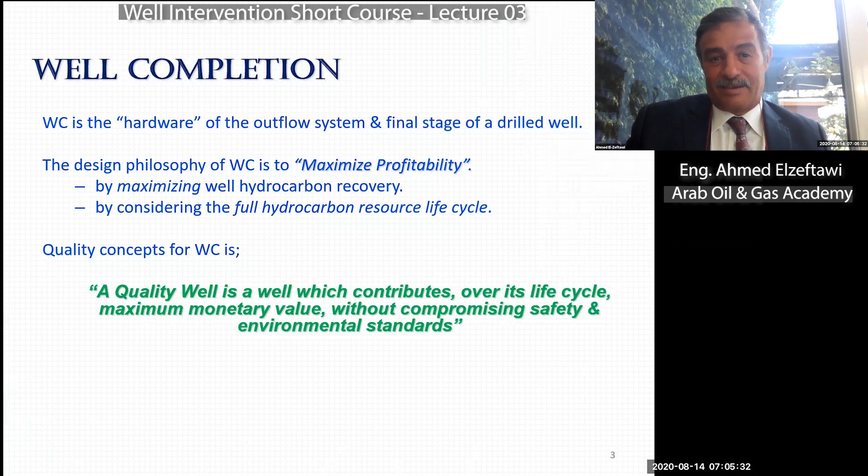Gas is the drive media. Without the gas, which is pressurized, no one can allow this oil to go out by itself. The oil needs a drive mechanism, which is the gas.

That's why, while designing the completion, you have to be sure that when you drill this hole and perforate, what comes out from the reservoir into your production tubing is a mixture of gas, oil, and water. And you have to be smart enough in your design to not let the gas escape out of the reservoir, going through the production tubing all the way to the surface without having anything in his hand.

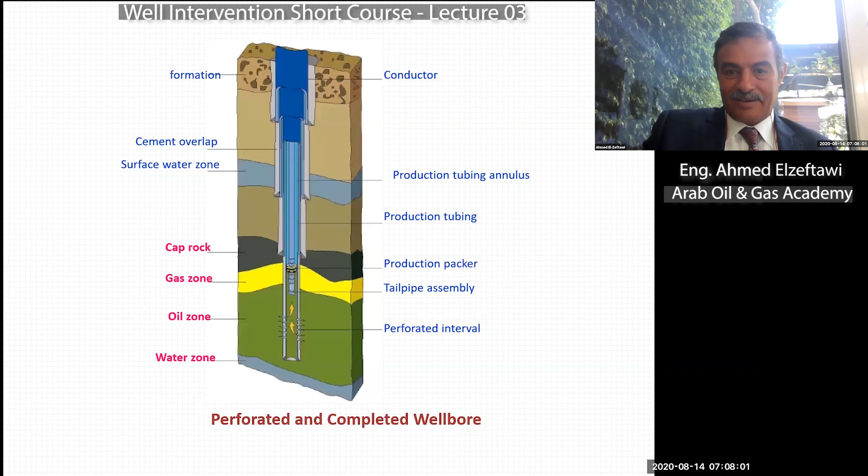We have what we call conventional completion, which is the normal completion we are using. It's a standard completion having a lot of accessories, which we are going to talk about. Each accessory is to do a certain function. And you have what we call monobore completion. The monobore completion is a production tube we run in the hole, but without accessories. Why, Ahmed? And if we can run completion without accessories, why do we run completion with accessories?

This is a big question, but normally we use a monobore completion in wells where the reservoir pressure is very low. So when we perforate, and then we have this mixture of gas, oil, and water start coming out from the reservoir, going up to the well, what lifts these liquids, which is the oil and the water, to the surface? It is the gas. If the pressure is low, that means the velocity is low.

And when we have accessories, like the ones that we will talk about, each accessory restricts the flow, because actually it's a smaller ID than the completion tubing itself. So this is a smaller ID. When we have the flow going up, this smaller ID restriction you make creates back pressure to the reservoir. So if the reservoir pressure is not strong enough, not high enough, the well will die. It will be a dead well.

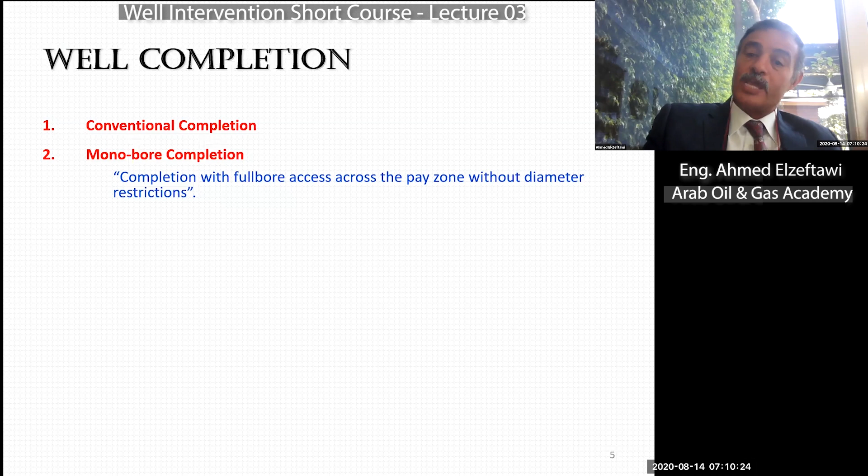That's why in some applications, we need to tell the pressure downhole, don't worry, you can go all the way to the surface, there is no restriction in your way. How we do it, this is not the course to talk about it. But I need you to know that we have what we call monobore completion, where it does not have accessories. And actually, if we need an accessory, we can run it temporarily in the monobore completion for a certain purpose and then remove it again. You don't have to know why or how in this kind of course, well intervention course.

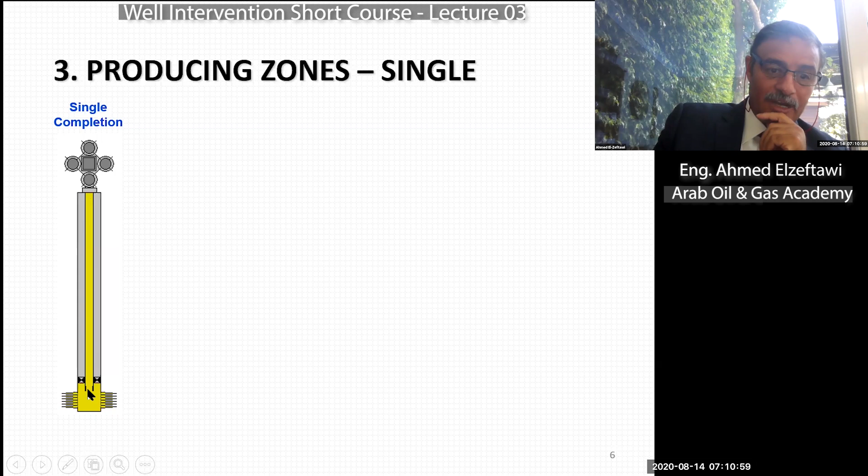What you see here is a single completion where we have a Christmas tree on top, and this is the casing, and we have the production tube all the way down, and this is our pay zone. This is where we produce from.

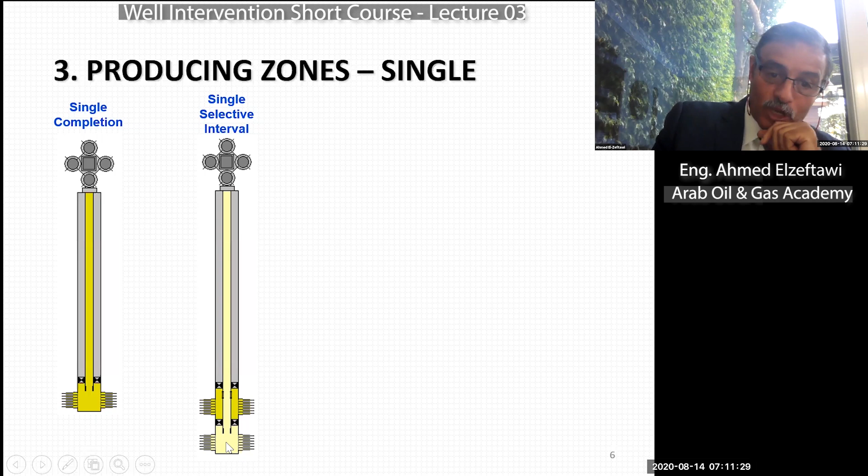This is typical. Sometimes, if you have two zones, upper zone and lower zone, what you see here, we still have one single completion, one production tubing going all the way down. And here we can produce from the lower zone. Why can we not produce from the upper zone? Because here we have what we call SSD, sliding side door. This is sliding side door, it is a closed door. So you cannot access the production tubing.

But here, we are producing from one single completion, one single production tubing, and we are producing from the upper zone only. We prevent the flow from the lower zone by having a plug at the end of the production tubing. You see it here, this is a plug. And we open the SSD, the sliding side door. So we are producing now from the upper zone only.

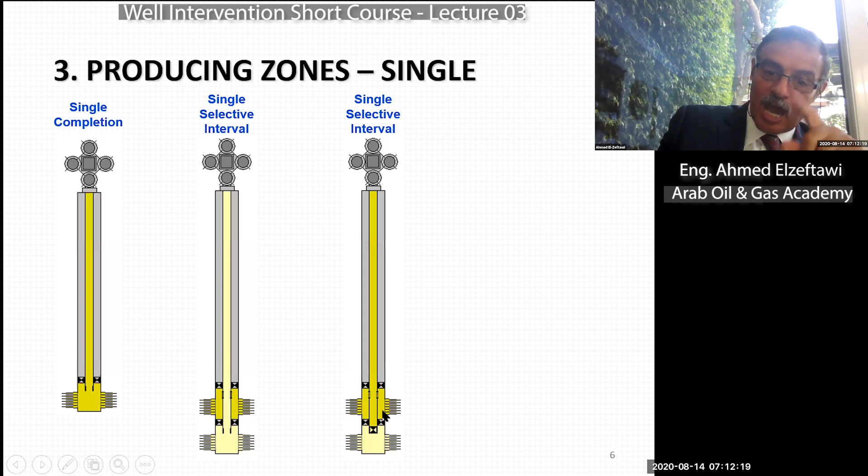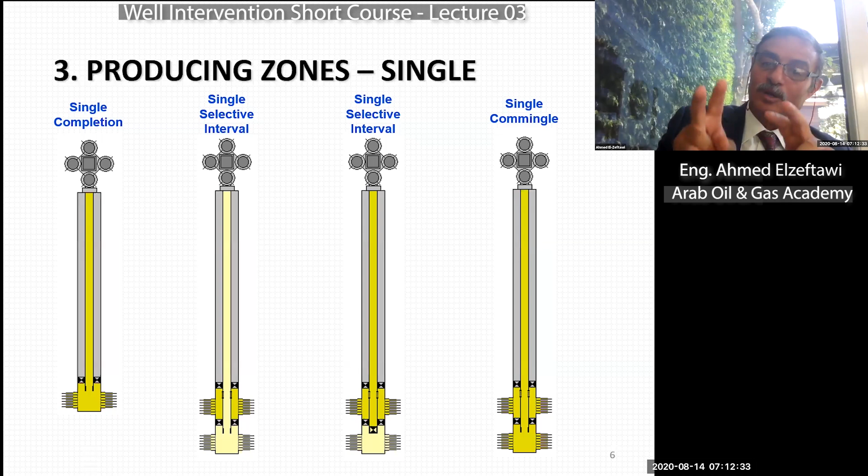In this example, the SSD is open. So now we are producing from both zones at the same time. We do this in case you don't need to study the characteristic of a particular zone. So you don't care, you just need flow out.

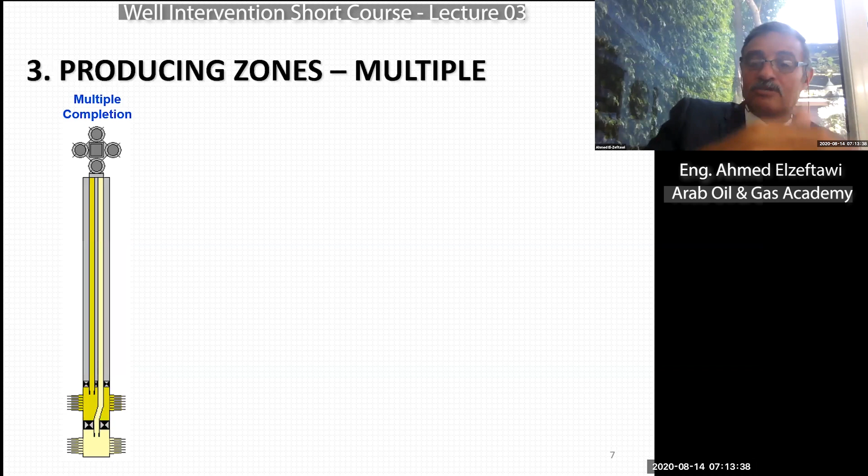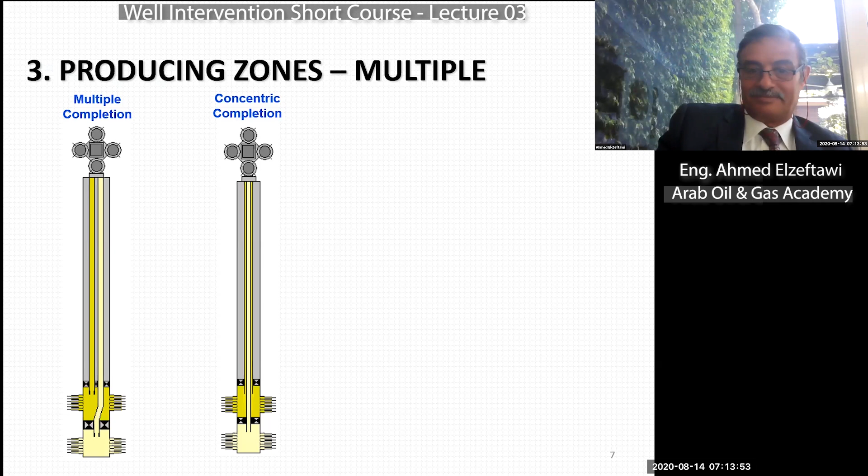So the packer mainly is to isolate these flows. In this example you see here, we have two production tubing, but one is inside the other one. What we have here is three zones, but we use only two pipes.

In this example, what you see is the short string. We are producing from the upper zone, the lower zone, and the middle zone, sorry. Why? The long string is to produce from the lower zone only. While here, what we have is a short string producing from the upper zone only, and a long string producing from the lower zone. The middle zone is not produced, because what we have here is an SSD, sliding side door, which is closed, so you cannot produce from the middle zone now. Ahmed, which one do we use?

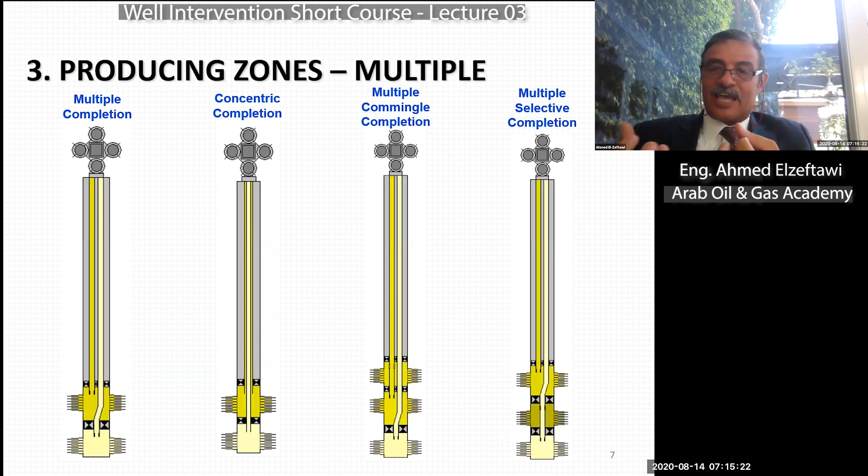Which is the best scenario, either single or dual? If I answer you this question, I'm dummy, because to answer this question you have to give me so much data, and based on that I can tell you the best scenario for this particular well.

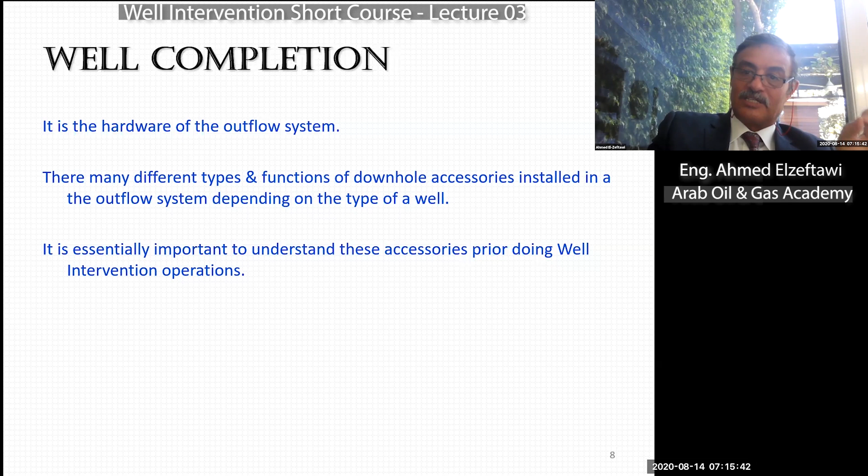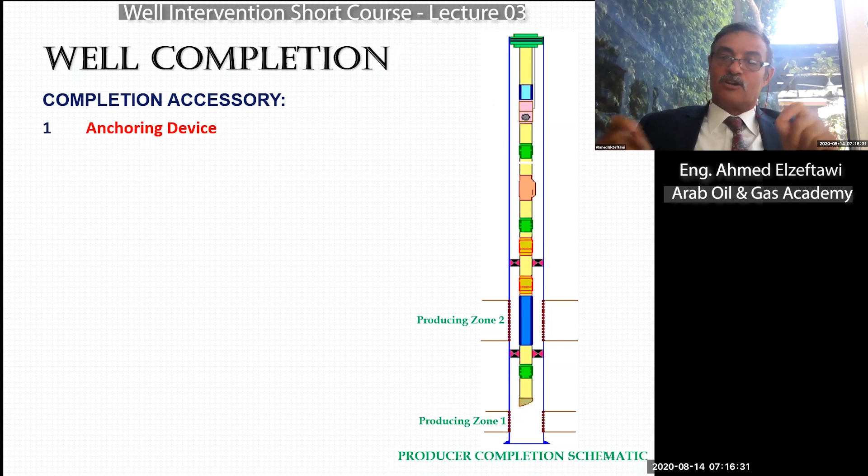So the first group we call anchoring device, where we can put under this name any device we use in the completion for anchoring. And we have the circulating device group, where we put all the devices we run in the completion that we use for circulation. The third group we call the isolation device group, where we put all the accessories we use to isolate.

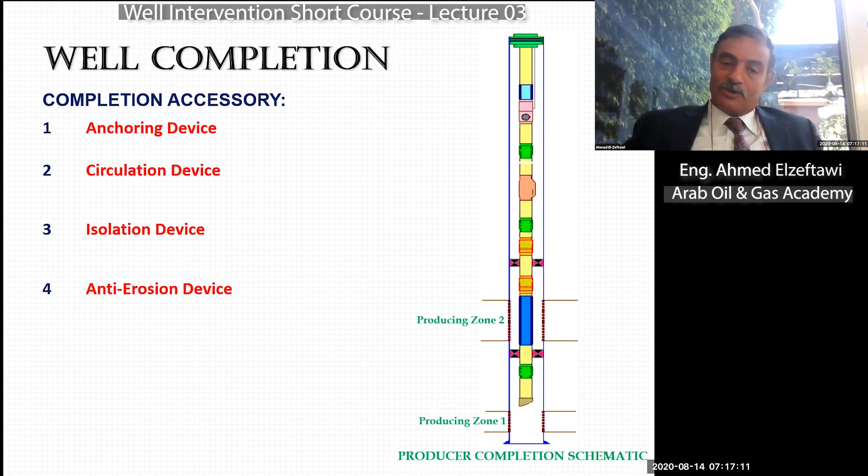The fourth group we call anti-erosion device, where we put the accessories we use to prevent erosion or minimize erosion. And then we have a group called other, where we put all other accessories we use which we cannot classify into one of these 4 groups.

So when we talk about an anchoring device, mainly you have what we call landing nipples. And if you look at the drawing here, you will find a lot of landing nipples. Is it 3, 10, 5, 4, 1? I cannot answer you this question. It depends on the design. The design depends on the data you are providing this software.

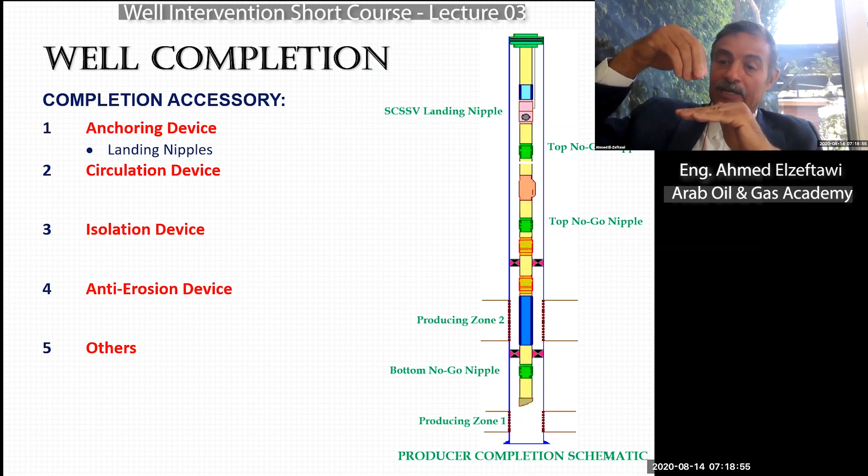But anyhow, these landing nipples—and please, you will see here what we call top no-go, bottom no-go. Don't be confused with the word no-go, because some people believe that no-go means nothing will pass through. But no, we mean by no-go, it's a shoulder inside this landing nipple. This shoulder will allow everything to pass through, except the one flow control device, whatever valve or plug you are running.

You need to set it in this particular landing nipple. It depends on size at the end. So it will allow everything to pass, but it will no-go—it will prevent its particular plug or valve from passing through, because it has to be set on that particular landing nipple.

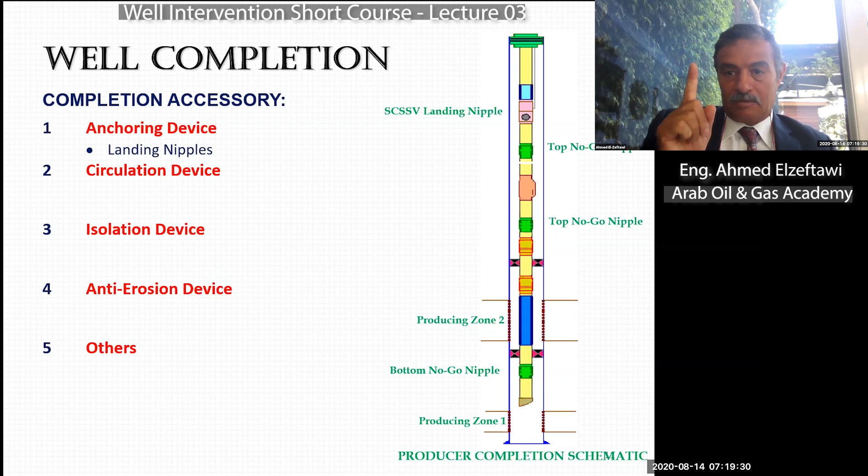Every landing nipple we use in the completion, it is for one purpose, which is to receive what we call FCD. FCD stands for Flow Control Device. What is the flow control device? It is any device to control flow, which mainly means plugs and valves. Plugs and valves—this is what we call flow control device.

I repeat, all landing nipples we run with the completion have the main function of receiving a flow control device. What I said is applicable to all landing nipples we run, except one, which is the last landing nipple in the completion. In our particular example here, you will see it here. This is the one.

This one has another main reason. This particular one is mainly to allow you to isolate the reservoir from the lowest possible point, to protect your reservoir from the lowest possible point, allowing you to make any operation above without affecting your reservoir. It is true that we use it for some other purpose, but this is the main one. But all other landing nipples—the main reason to have it, please—is to receive flow control devices.

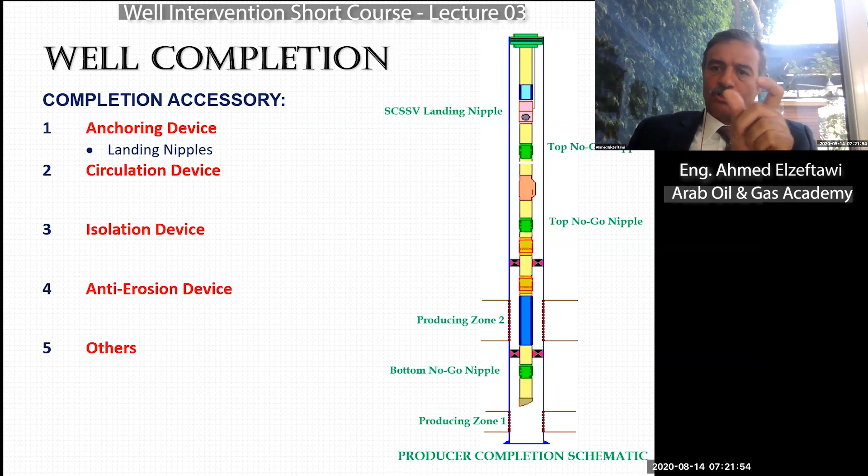One day in my lectures, I gave this question to the guys as homework. The question says: what is the purpose of a landing nipple? So I gave him choices. One of these choices is to receive a flow control device. Another choice is that we use it for depth control.

So one of the wireline supervisors, while answering this question, selected depth control for correlation to depth. I said, thank you, but your answer is wrong. He said, come on, Ahmed, I'm a wireline supervisor for the past 15 years, and I'm professional in my work, and I am using the landing nipple to correlate my depth.

I said, yes, I believe you, and I know that you are doing that. But this is not the main reason we have it for. It is exactly...

...when I go to the supermarket to buy milk for me. And then Dr. Ahmed Al-Garhi says, on the way back, would you please buy me a packet of cigarettes? I said, fine, no problem.

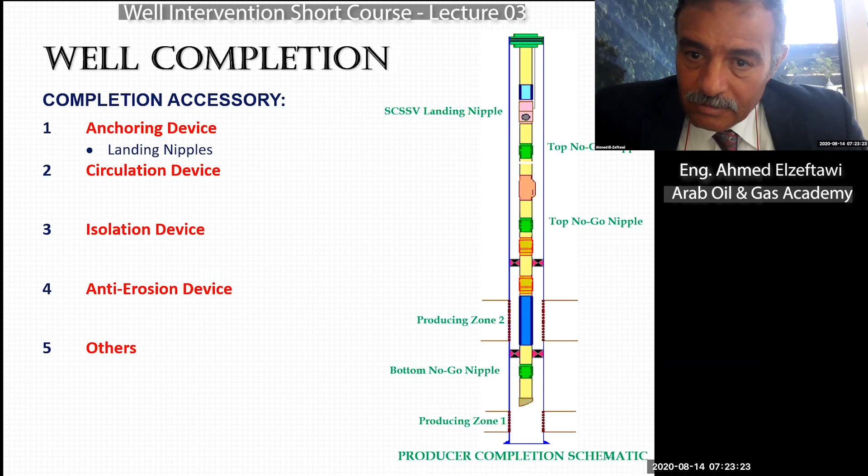If any of you guys ask me, Ahmed, where are you going? Should my reply be, I'm going to buy the packet of cigarettes for Dr. Ahmed Al-Garhi? Of course not. I'm going to buy milk for myself. These cigarettes I am buying for Dr. Ahmed, I am doing as a favor, but it is not in my job description. So remember that.

A flow control device, we run it to sit in the landing nipple. A landing nipple's main purpose is to receive it. If this landing nipple is doing 10 other things, yes, she's doing it as a favor. So a landing nipple is to receive flow control devices.

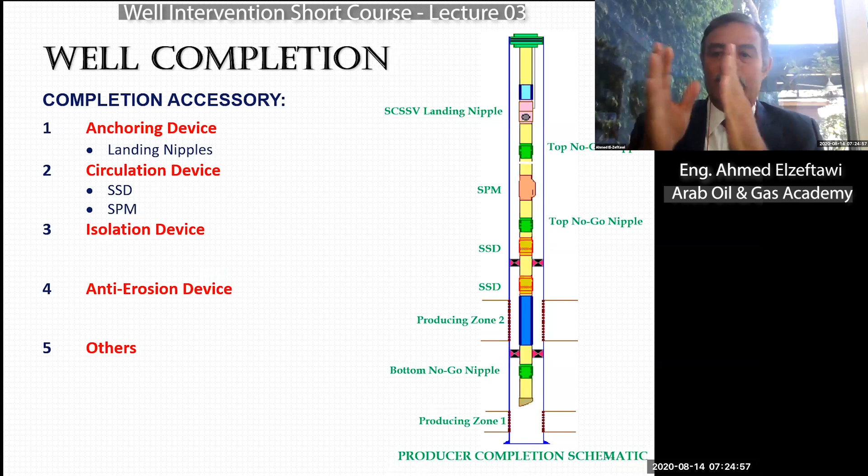When we talk about the second type, which is the circulating device, then automatically you should write SSD and SPM. SSD stands for sliding side door, and SPM stands for side pocket mandrel. These two devices are mainly to allow us to make circulation between tubing and annulus, or annulus to tubing. Annulus is the volume or area between the tubing and the casing.

We will talk about each one. Isolation device - the word isolation is welded to a word or device called Packer. And Packer is to isolate. The main reason for the Packer is to isolate. What you see here in this example, we have two Packers - a top Packer here, and a bottom Packer here.

This string of pipes and accessories, which its length might be 10,000 feet, 15,000 feet, 20,000 feet - which device here holds the weight of this whole string? It is a device on top here. We call it tubing hanger.

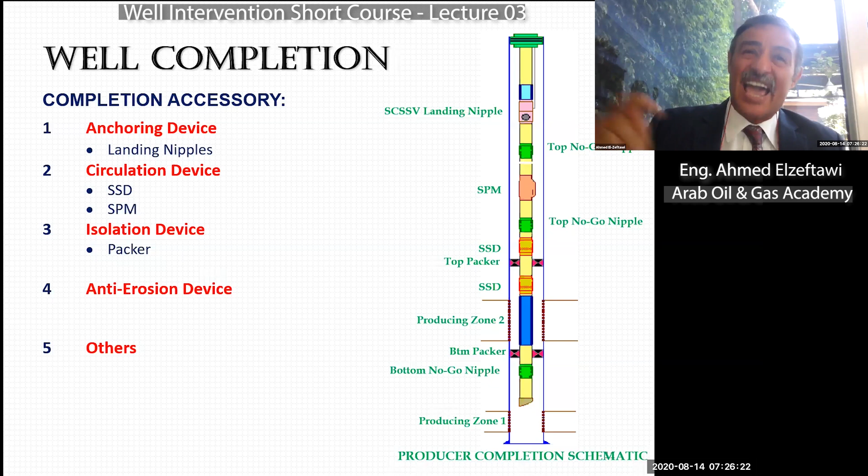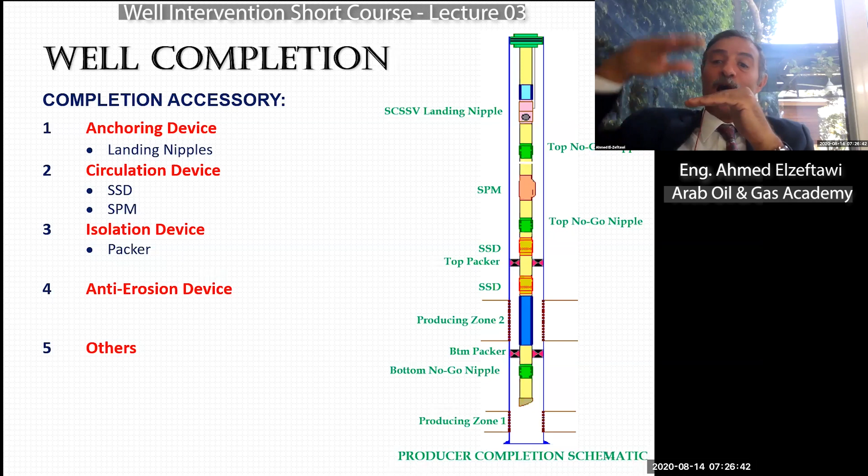But actually, the tubing hanger holds the weight of the top completion only, while the bottom completion is hanging by another device. I mentioned top completion and bottom completion - what is that, Ahmed? I tell you that. Anything above the Packer, we call it top completion. Anything below the Packer, we call it bottom completion. The majority, of course, of pipes and accessories are on top.

The bottom completion, actually, is a couple of joints - couple of pipes, joints, each joint is 33 feet. And it has some accessories like a perforated joint, wireline entry guide, a couple of landing nipples, and maybe permanent memory gauges. But this bottom completion is short compared to the total length of the well.

Here, what you see is the lower Packer. This lower Packer, and what's below it, is the tailpipe, we call it. The tailpipe is the bottom completion. You see these short pipes - this is hanging by the Packer.

But if I ask you, what is the main purpose of the Packer, and I give you choices, and one of these choices is to hang the bottom completion - if this is your answer, I will dig a hole and bury you in this hole, because your answer is 100% wrong. Why wrong? Ahmed, you just said a while ago that it hangs. Yes, I said it does, but it does this as a favor.

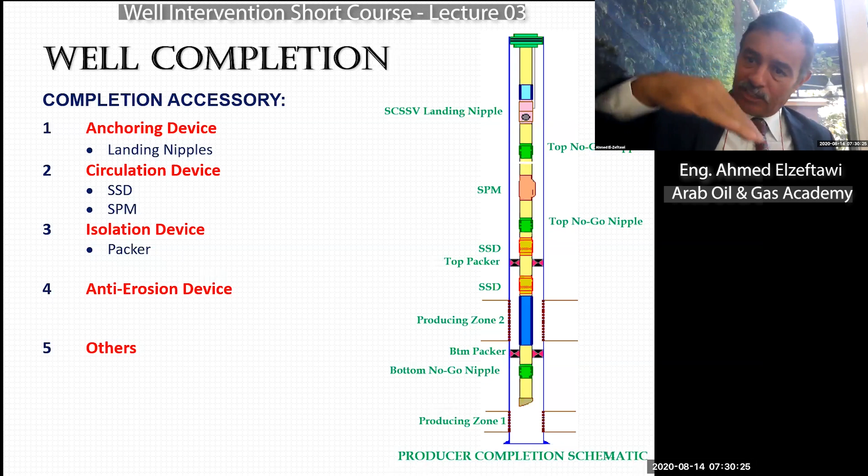This decline in production is a big story, and there are so many factors affecting it. But one of them is that when you produce from a well, the reservoir downhole is made of grains, particles of sand, as we discussed in one of our lectures. There's a minor distance between each particle of sand and the other, which you cannot see with your naked eye, only through a microscope.

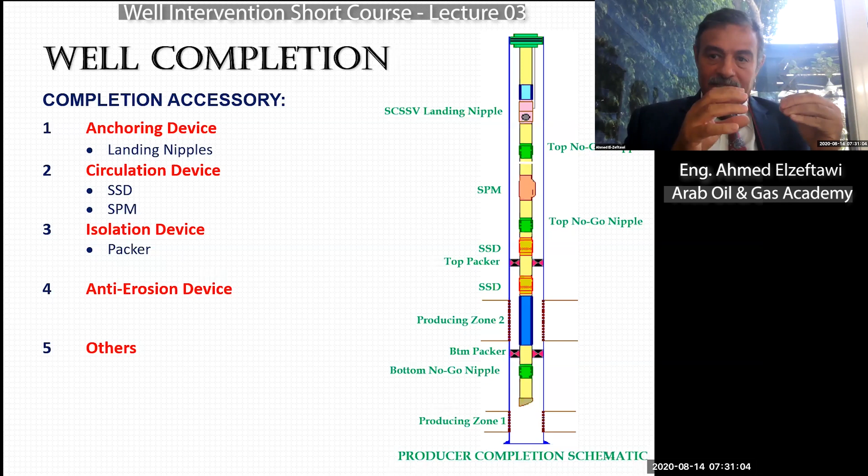Oil and gas go through these channels you cannot see with your naked eye, until it goes inside your well and up all the way to the surface. Over time, friction between the oil and these sand particles will reduce its velocity. Accordingly, some of the scales, wax, and paraffins will sit on the outer surface of these grains, making these streets more narrow, and eventually blocking them so oil cannot go through.

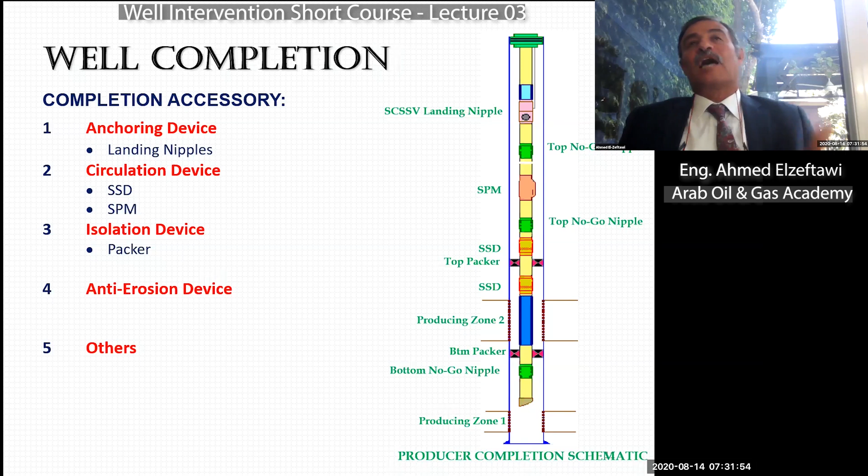If this happens, you have to do some of the solutions here, like deciding to do a stimulation job where we run coiled tubing and start pumping acid. This acid will penetrate these narrow roads or streets, eating away the paraffins, debris, and waxes, allowing the street to return to its original state.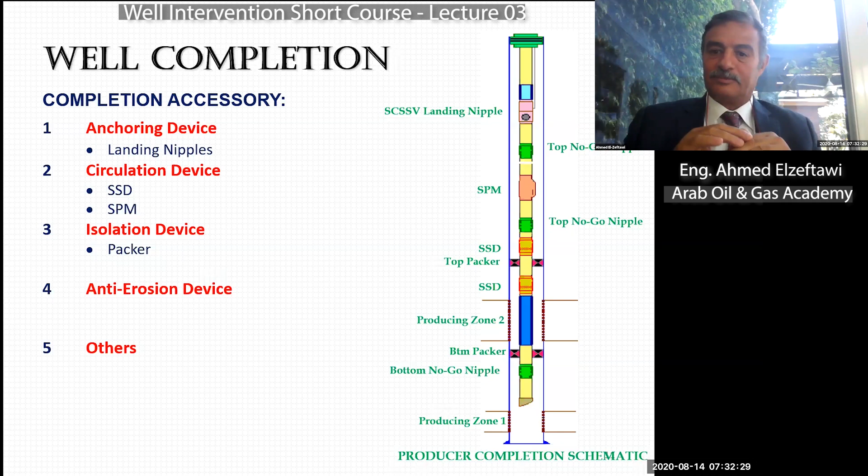If you don't have a packer here, the acid you are pumping through the tubing - part of it will not go into the formation but will escape out, filling your annulus, affecting your casing, eating your casing. So the packer is also there to isolate the annulus from the treating fluid we are pumping. So the packer is there to isolate. Keep that in mind.

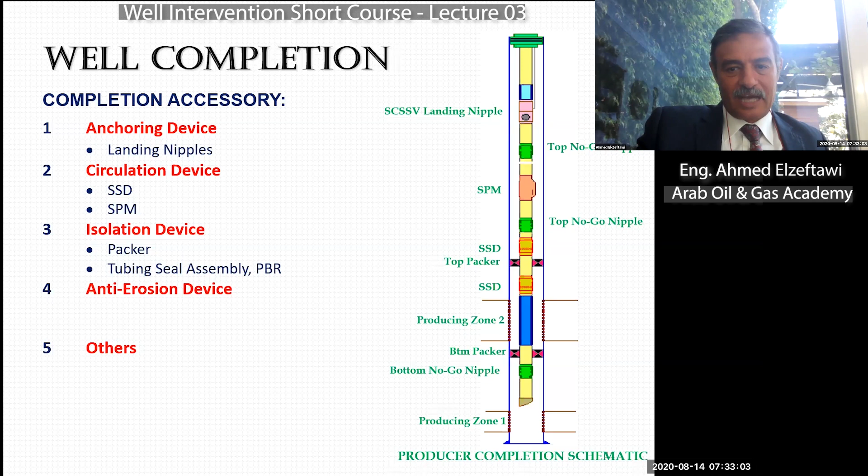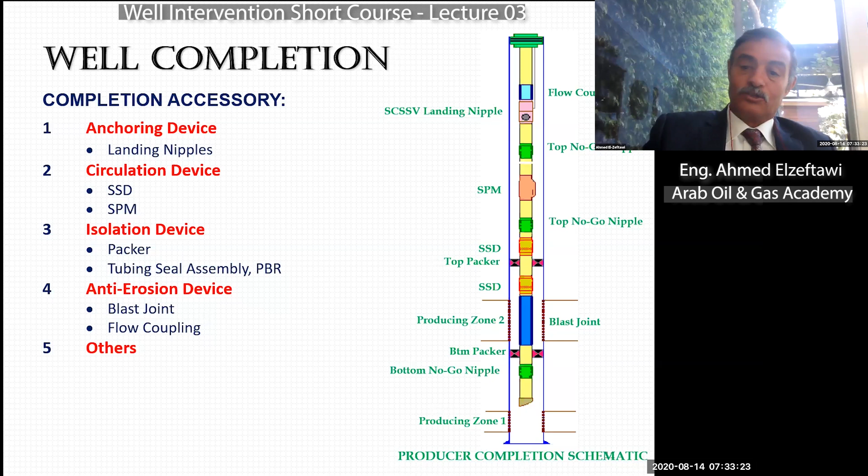The anti-erosion device has two types: blast joints and flow coupling. The blast joint is what you see here in this drawing with blue color. Since we have one single completion in this example with two zones, when we perforate the upper zone, in front of this blue device, oil will come out from the reservoir with velocity.

It hits the outside, the OD, the outer diameter of your production tubing. This erodes the OD of the pipe because it contains sands, which start doing like sand blasting, a hammering effect on the outer side of the pipe. After some time, you will have holes here. If this happens, you have to stop production, kill your well, bring a workover rig, and pull this completion all the way out to the surface to replace the damaged part of your production tubing.

Then run it again, which will cost you a lot of money. So instead, to prevent this from happening, in front of the perforation we put a pipe - but a heavy wall pipe. It has the same idea as the regular pipe, but the wall thickness is higher, so the OD is bigger. This allows it to resist the hammering effect, and instead of lasting 1 year, it will last 3, 5, or 6 years, depending on the material and thickness used. This is the main reason for having this anti-erosion device.

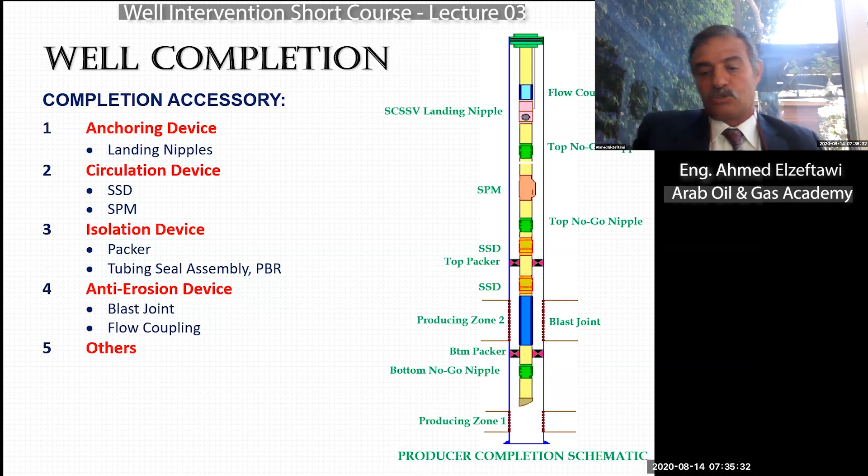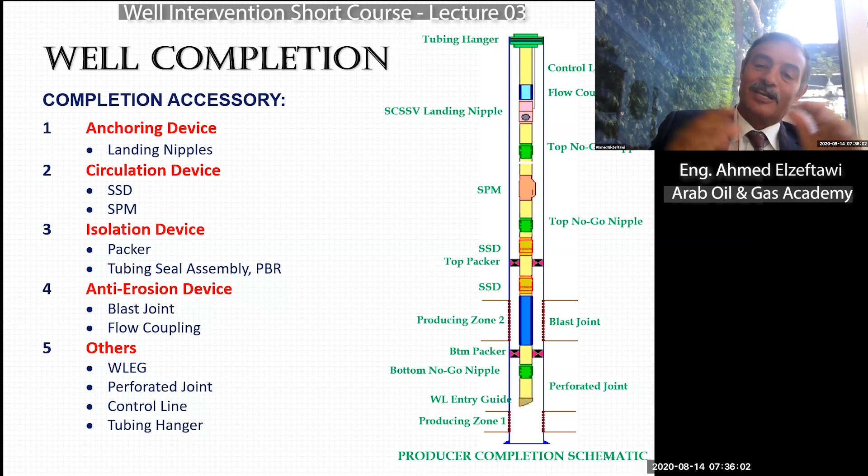Others, which contain all the accessories we cannot classify into these four groups, like the wireline entry guide, which is the last piece we put in the tailpipe. We also have perforated joints, control line, and tubing hanger. These are mainly the accessories we use in completion. Completion has two parts: one part is mainly below ground, which is all these devices we've talked about, and the other part, above ground, is the wellhead and the Christmas tree.

Although I am a mechanical engineer, and although I work all my life with international organizations, believe me, for years I didn't have the knowledge that makes me professional in my work. For example, for years I was under the impression that wellhead and Christmas tree are the same thing. What is this? This is Christmas tree. What is this? It is wellhead. The same. Till I got the knowledge that there is a big difference between the wellhead and the Christmas tree, which we will talk about in the coming session.

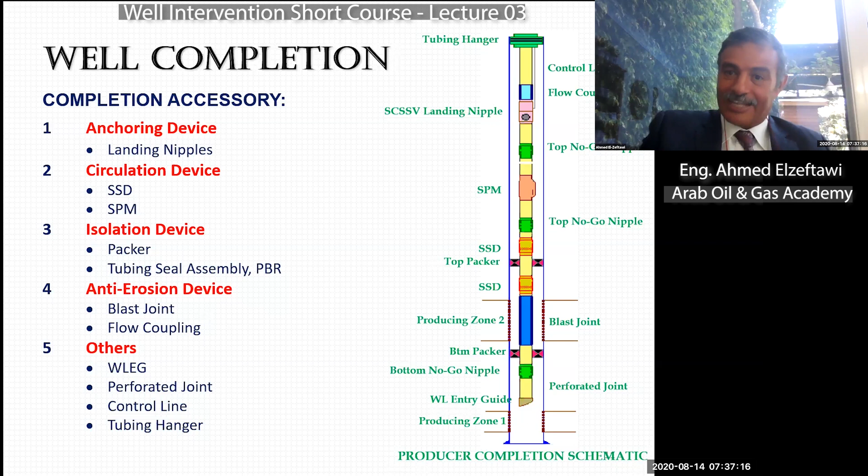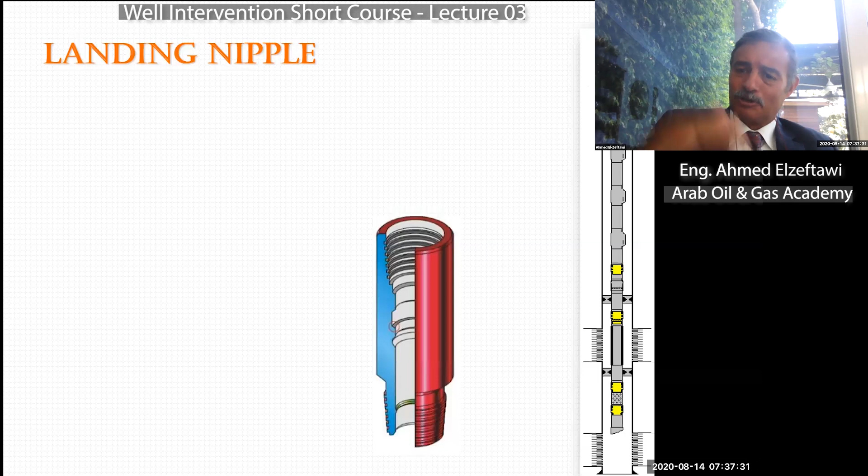So now let us start actually with our accessories. We start with landing nipple. What's a landing nipple? It's an anchoring device, a tubular short pipe, and it has 3 features: shoulder, seal bore, and profile. What you see here in this drawing, this is a landing nipple.

All landing nipples are to receive a flow control device, as we agreed, except the last one, which is to isolate the reservoir from the lowest possible point, although it does the same also. It allows us to receive a flow control device, but this is not the main reason like the others.

Any landing nipple has 3 features: shoulder, seal bore, and profile. Please remember, this is not a completion course, because if it were, what I'm saying would be wrong, since we have landing nipples without shoulders. Then I would have to go into what we call selective landing nipple and non-selective landing nipple, but this is not the course about that. Generally, any landing nipple has 3 features: shoulder, seal bore, and profile.

The aim of this course, what I need you to know about the landing nipple, is 2 things: why we use it to receive a flow control device, and how we use it. How we use it is by utilizing these features.

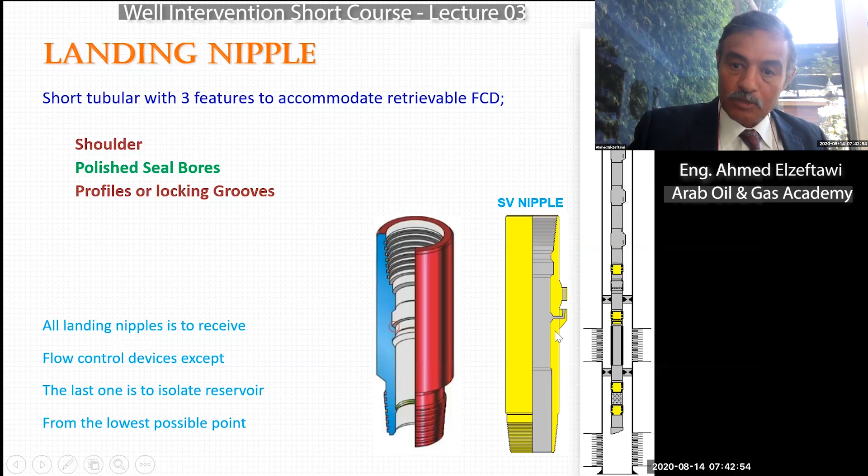What makes the seal is rubber packing. Any slickline tools we run have external packing, external rubber. We call it elastomeric packing. This elastomeric packing is sealed within this seal bore or polish bore. Polish bore or seal bore mean polish bore. This bore has to be very smooth, like this glass, very smooth.

No grooves. If there is a groove, it will not seal. And this is...

I believe all of you know about the Gulf of Mexico disaster, where people were drilling. I don't want to go through all of this, but anyhow, when the driller felt there was a problem, with drill pipe and drill collar run almost 3 miles down, the pressure was able to overcome the mud weight and the hundreds of tons of drill pipe and drill collar, pushing them upward. He closed a device to seal.

This device, which we call the annular BOP, is rubber that seals around the pipe to prevent escape of pressure. But the pressure is very strong, and I say it is very smart as well, in the sense that when the pressure fights you, it always tries to find your weak point, and finds it by default and attacks from there.

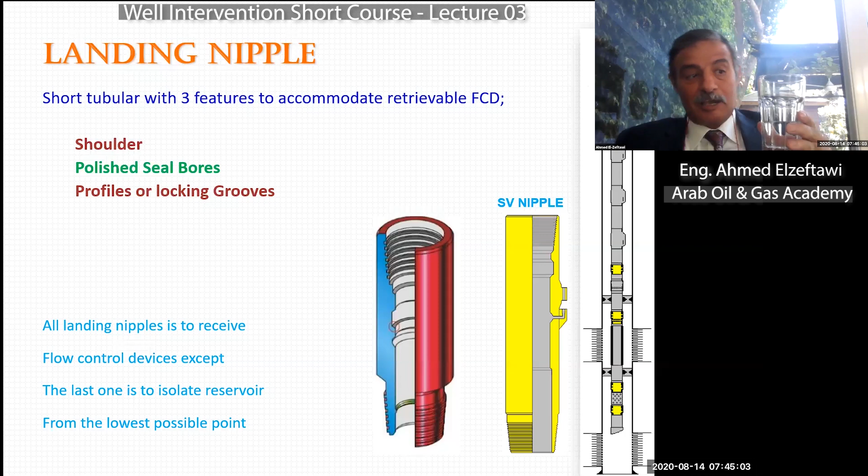So when the driller closed the annular BOP on the drill pipe, pressure tried to escape, but it is locked now. So what did the pressure do? It started eroding the OD surface of the pipe, making a groove, a very tiny groove, because rubber will not be able to seal if there are grooves. And it did that, escaping through this narrow groove.

The seal, or the rubber of the annular BOP, didn't help anymore, and pressure escaped all the way to the surface, to the rig floor. So that's why it has to be polish bore or seal bore.

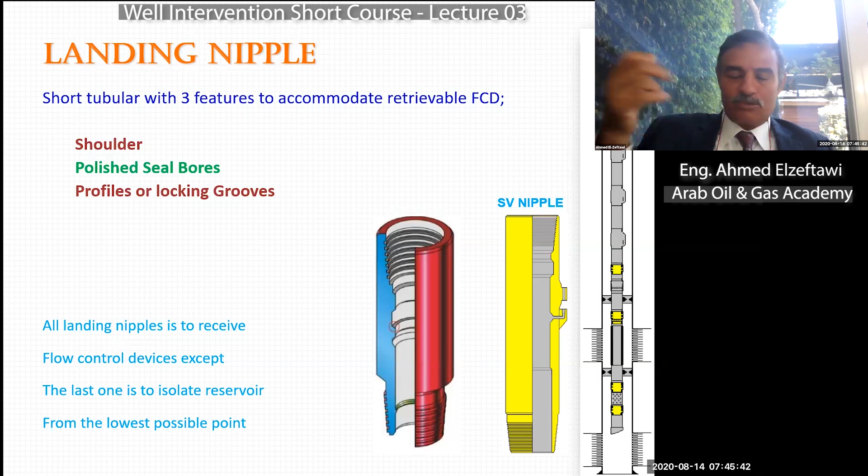Landing nipple is used to receive a flow control device. How does it work? It has a shoulder to guide and locate the flow control device to its matching profile. The reason for the profile is that the dogs of the flow control device lock the device in place. What makes the seal is the elastomeric external packing that sits within this seal bore, or polish bore as we agreed. Now the device is set correctly, preventing the escape of oil.

What you see here is a landing nipple, but we call it SV nipple. SV stands for safety valve nipple, because this particular landing nipple has certain features here. You see it? You see here?

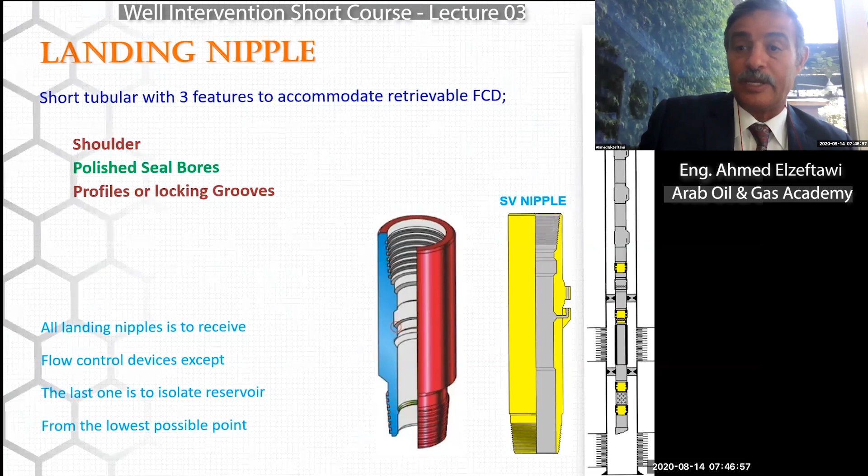These features are to connect what we call a control line, which is a stainless steel tube, 316, quarter inch in diameter, and it runs all the way to the surface. You can see it in the drawing. It goes all the way, this control line, to the surface, where we have a control panel.

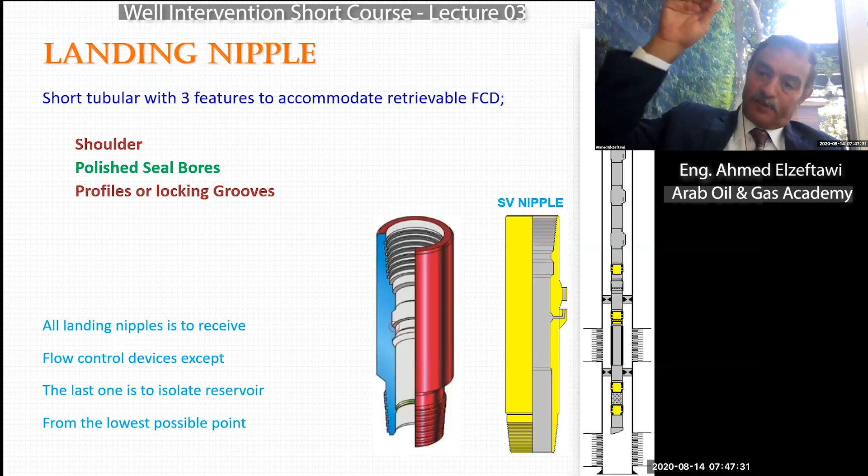Which has a pump, where we can pump fluid to activate the downhole safety valve, which is set in this nipple, the first nipple in our completion, where we set the downhole safety valve in order to be able to control the well.

Okay, since we are setting in this landing nipple a downhole safety valve, and the downhole safety valve is one of the barriers, we call it, if you remember, an emergency barrier, we need to talk a little bit about the downhole safety valve. So let's talk about the downhole safety valve.

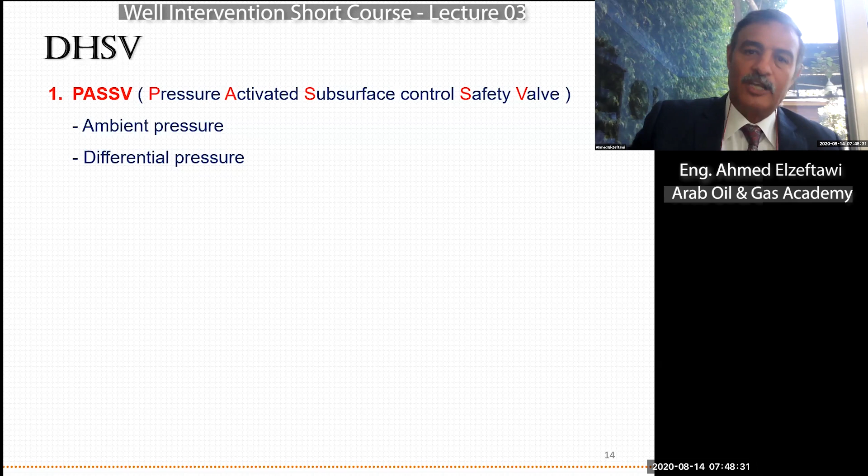We have two types of downhole safety valve. In the past, we had what we call PASSV, which stands for pressure activated subsurface control safety valve, and we had two types of that valve: ambient pressure and differential pressure type. When I talk about this type of valve, I use the past tense because we stopped using these valves since last century.

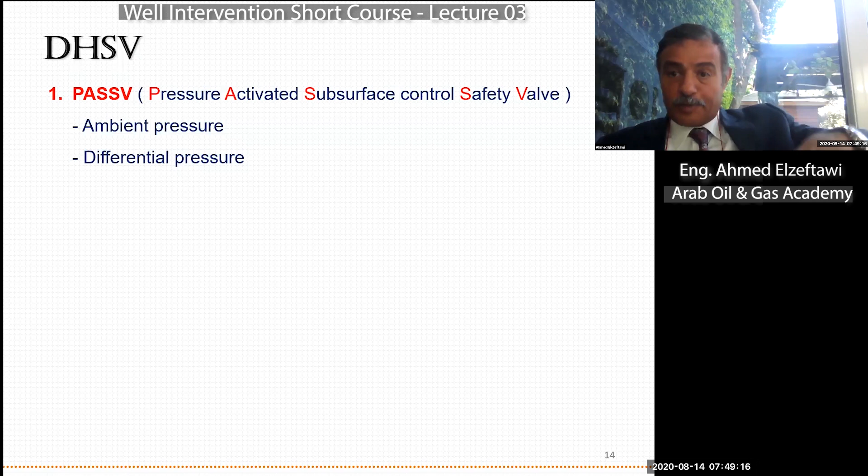1986, 87 at the latest, we stopped using them. Why did we stop using them? Because they create problems for us. Actually, this type of valve, like the differential pressure type, we run it in the hole, but at the surface we preset it to open at a certain differential pressure. We run it with the slick line, open, all the way below the packer, which sits in the landing nipple there. It's open, and then we are producing from the well now.

If the downhole pressure, the bottom hole pressure, changes, accordingly changing the differential pressure, this valve will automatically shut off the well, securing your well and solving your problem. If you need to reopen this valve, what you do is pump pressure from above to bring the differential pressure below and above to the preset level, and then this valve will open, so you can start producing from this well again.

Great, Ahmed, what you see is very nice, but we don't see the problem. The problem is that the bottom hole pressure is never constant. If I tell you this well's bottom hole pressure is 3,000 psi, do you believe it stays 3,000 psi at 8 o'clock, 10 o'clock, noon, afternoon, evening, tomorrow, next week, next month, next year? Of course not. The bottom hole pressure is always fluctuating, going up and down during the hour, the day, the month, the year.

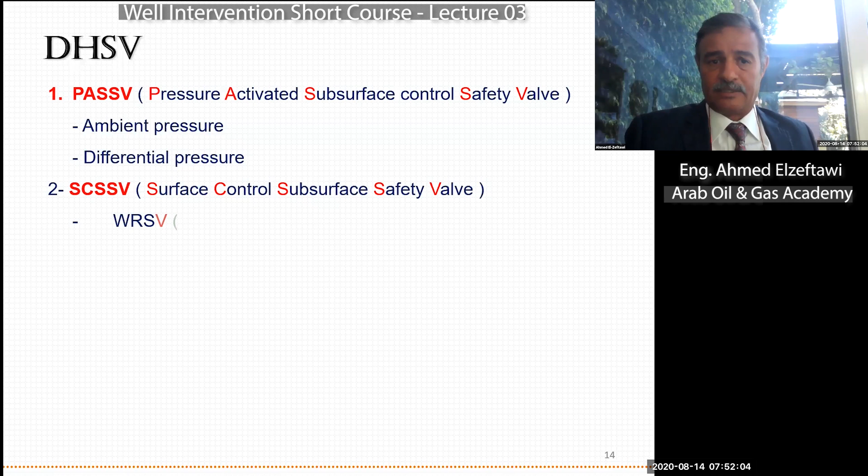We have two types: wireline retrievable safety valve and tubing retrievable safety valve. We might go quickly through them to talk about it. But before we go to the next slides, please look at what I wrote in green.

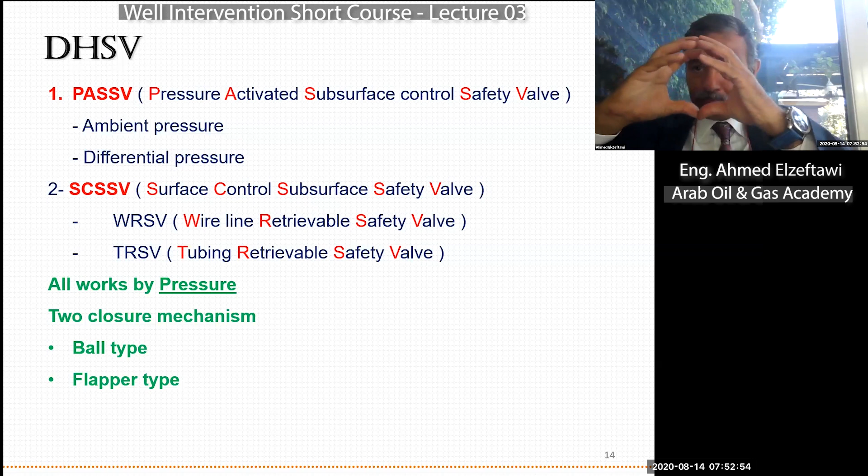Valves work by pressure. All these downhole safety valves work by pressure. They don't work by temperature, they don't work by pushing, they don't work by nice words - they work by pressure. And there are only two closure mechanisms: either ball type, that opens and closes, or flapper type, that opens and closes. There are no other types. So when I ask what are the two closure mechanisms we use, please don't say gate valve, hammer valve, or poppet valve, because we don't have such mechanisms. The common ones are ball or flapper.

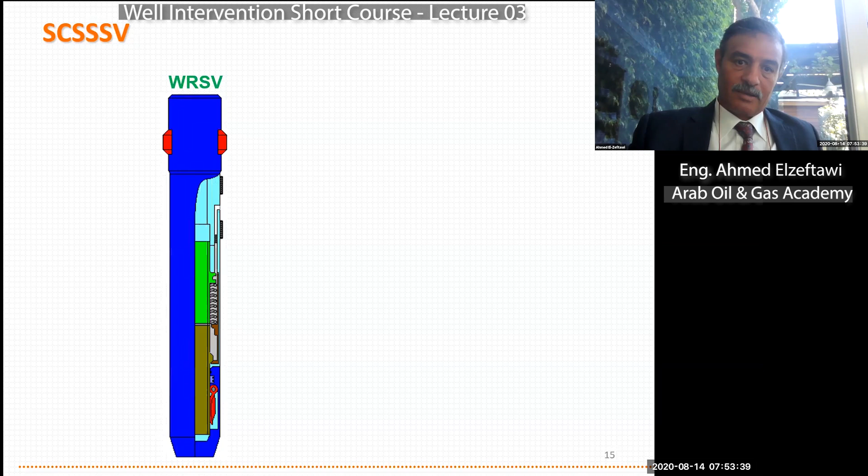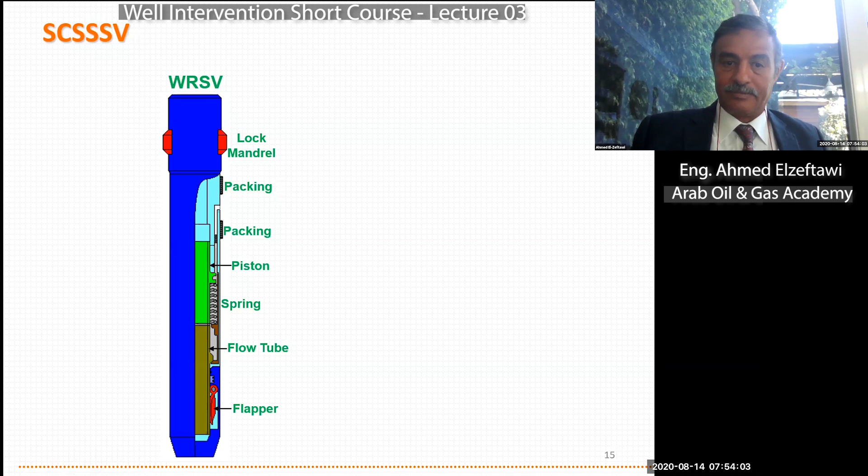Let's talk about the first one, the wireline retrievable downhole safety valve. If your selection is to run this valve, here it is. Very simple in construction: the body is blue, and the red is the lock mandrel or dogs, spring loaded, pushed by the spring to sit in the profile of the landing nipple. We also have the packing, which seals against the seal bore of the landing nipple. Inside we have piston, spring, flow tube, and flapper.

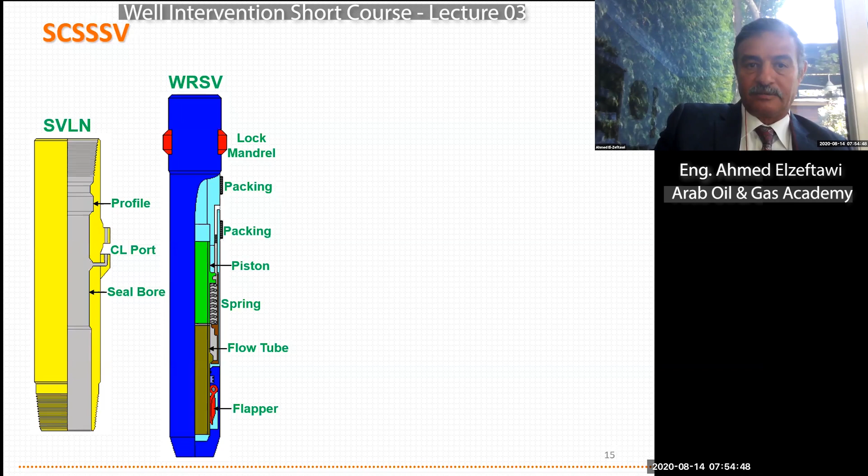The flapper is one of the mechanisms we talked about that opens and closes. If your selection is to run this, you run the completion, and while running it, you run the landing nipple for this valve. Once the completion is run, you call the slick line operator to come run this valve and set it inside the landing nipple. This is the landing nipple we run inside the well - it's part of the completion, fixed to it - and this is how you see it.

This is what we have here: this downhole safety valve, set inside its landing nipple already. These are the dogs, now inside the profile to lock it in place. And we have packing, one above this hole and one below, to allow us, when we pump fluid inside this stainless steel control line tube, that fluid to enter here. What allows this fluid to enter the valve is these two packings - it cannot go anywhere else, the only space for it is to enter the valve.

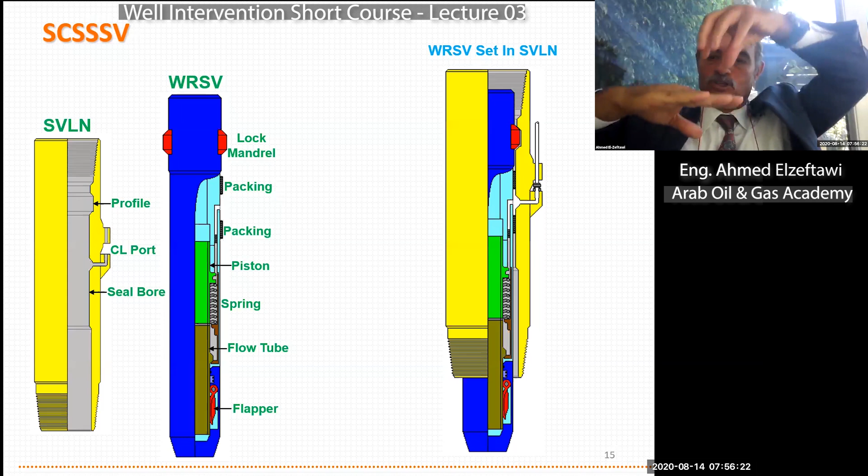The fluid enters the valve, pushing the piston, which is green, downward. The piston pushes the spring, which pushes the flow tube, a piece of pipe. When pushed down, it pushes the flapper, which is closed by default by a spring washer - if there's no pressure on the valve, this spring pushes the flapper to keep it closed. You can apply pressure from above and it opens, but from below, it locks. So since this flow tube is pushed by the piston, which is pushed by the pressure, it pushes on the flapper and opens it.

As long as the flow tube is in this position, the flapper cannot move in this direction unless you bleed off the pressure above. If you bleed off the pressure, this spring will retract, pushing everything upward. The moment the flow tube is out, the spring locks. This is how the mechanism works, a very simple idea actually.

In the past, I used to say that what we pump here is hydraulic oil, until the moment I discovered that what I'm saying is wrong actually.

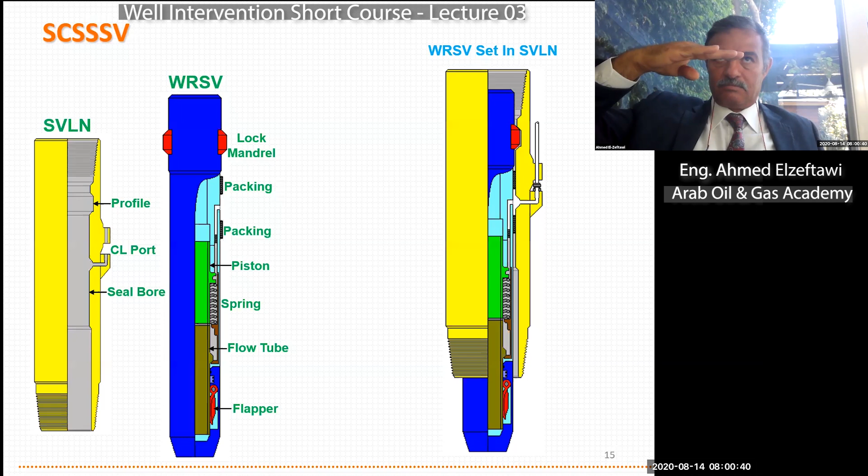So now the flapper is secured, the well is secured, you've solved your problem. Now we need to open this downhole safety valve. How do we open it again? Should I repeat the question? Now, during production, we have a problem, we bleed off the pressure, we shut the valve, we secure our problem. Now we need to reinstate production, so first we need to open this valve.

So to open this valve, people tell me, Ahmed, go to the control line, apply pressure to open it. Crazy, you cannot. This valve, which is closed now, has a differential pressure on it: below you have 3000 psi, above you have 0 psi. You cannot open a device which has a differential pressure. What I'm saying is generally true, because we have devices that can open at 15,000 psi differential pressure, but generally you have to equalize the pressure to work safe.

So this is closed now. To open this flapper, first you have to apply pressure from above to equalize the pressure if it is not a self-equalizing type. So the pressure here is the same as the pressure there. Now you can apply pressure to the control line to open this flapper.

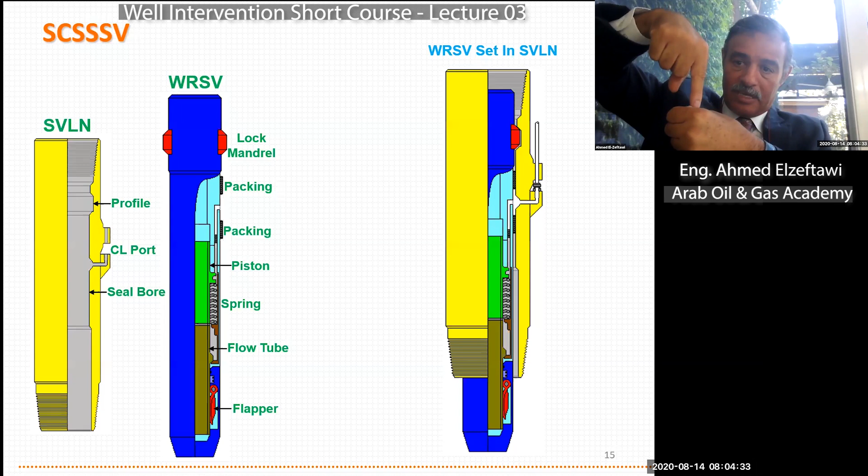So I cannot. What to do? We use what we call a prong. Prong, P-R-O-N-G. The prong is a bar, a steel bar. I attach it to the running tool. So when I am running now, this bar is pushing this flapper to keep it open, all the way till I set it in place, and then release the running tool from the valve while pulling out of the hole. The moment the prong is out, the flapper will close. This is how we run it open.

One more thing you have to know: during emergency, if you need to shut off this valve, we agreed that we bleed off. When you bleed off, the system goes up, pushing the fluid inside the valve and inside this stainless steel tube all the way back to the tank. This is the return. This volume has to be monitored. The return volume has to be monitored. Why? Because this is one of the reasons that tells you if the valve is closed or not.

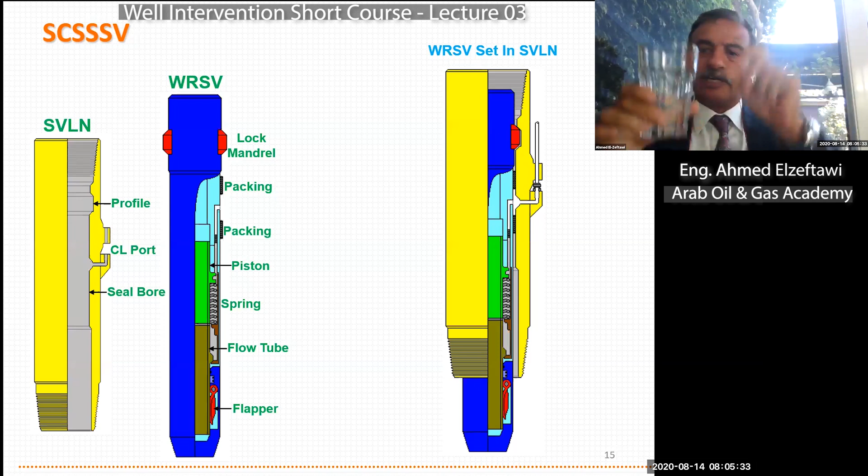In a normal situation, when you bleed off the pressure, the amount of return fills this glass, but today, when you bleed off the pressure, the return fills half the glass only. That means what? The valve is still open. That means while the system was coming out, it didn't go all the way up. It goes to the middle, somewhere in the middle, and stops. Most probably the flow tube is stuck and didn't continue pulling out to the original position. So knowing the return is one of the functions that tells you the valve is not closed. Be careful.

So this is nice, and instead of the wireline, we have to make two runs. You run the tubing and you run the landing nipple, and then you run the valve separately. But here it is one run, because the valve and its landing nipple, it is one body, two in one.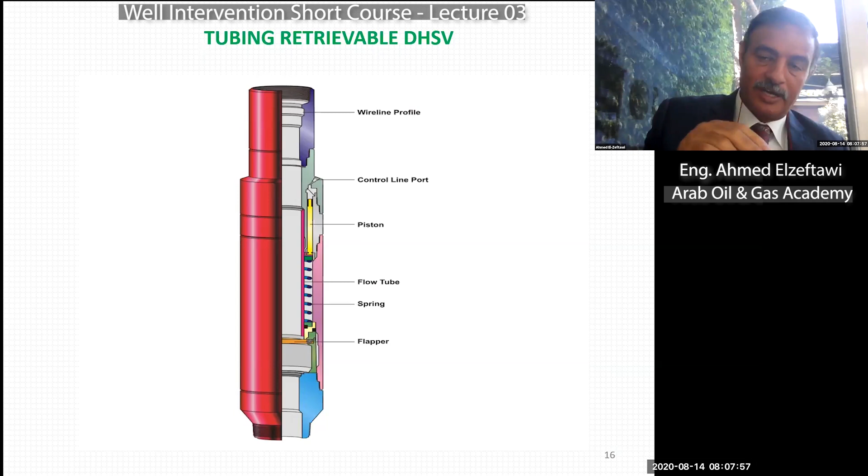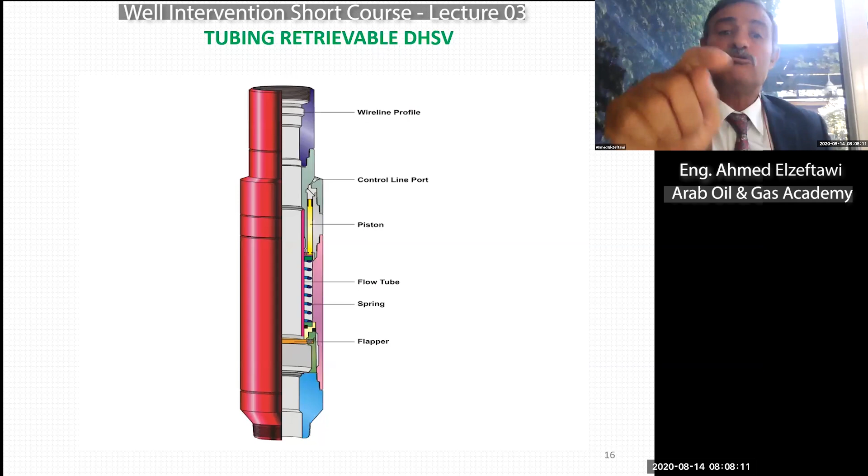So if it has this big disadvantage, why do we use it? Because actually it has one single advantage over the wireline from our point of view: if you have two valves, one wireline retrievable and one tubing retrievable, the same size, the tubing retrievable ID is larger. So I used to use this valve in very low pressure reservoirs, telling the oil, do not worry, Mr. Low Pressure, while going up, traveling all the way, there is no restriction. So you can go all the way up, safe.

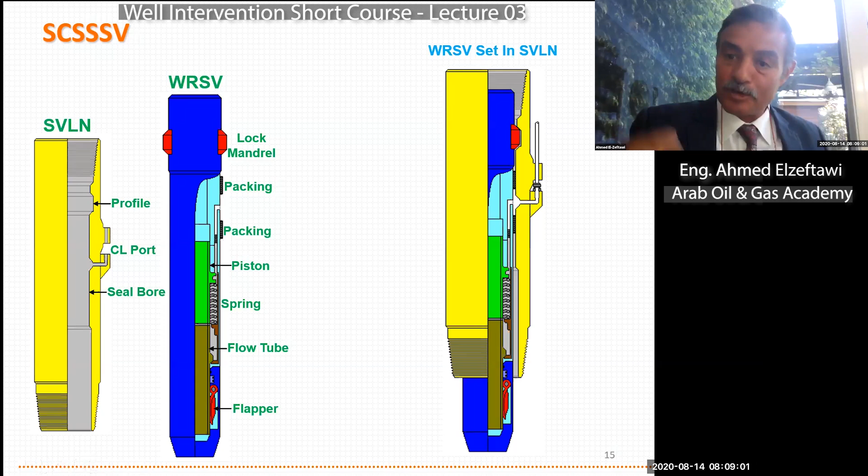And actually, I use it in the opposite too. I use it in a very high pressure reservoir. Why? Because if we go back to this, this is the wireline retrievable. While producing the oil and the gas is going here, what stops this annulus? It is the packing. If in high pressure gas runs, this gas attacks the packing and eats it.

Here in this design, we don't have such a packing because this is not retrievable. I don't have to pull it and put it back. That's why it lasts longer. Actually, the life of the wireline retrievable is between 18 and 24 months, where this tubing retrievable can last up to 20 years. So that's why, but from our point of view, it has the big advantage that the ID is larger compared to the wireline.

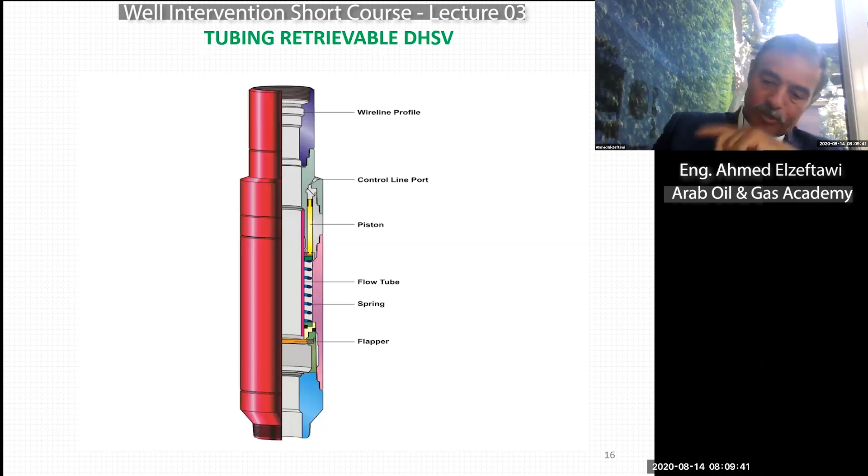This is the tubing retrievable. When it is closed, you see the flapper is locked, and when it is open, you can produce from it.

Why, Ahmed, are you not talking about all these topics? It's because this is a simplified course. Yeah, I don't teach it to you guys, but I can teach it in other courses.

This slide tells us the story of the downhole safety valve in one slide. We have two types: surface control and subsurface control. The subsurface control has two types: ambient and differential. Remember, we stopped using this type since last century. What you are using now is the surface control, which is wireline retrievable or tubing retrievable.

In wireline, how do we run it open? We use this prong, this steel bar, attached to the running tool. But with tubing retrievable, we can use the control line because the control line is fixed to the valve.

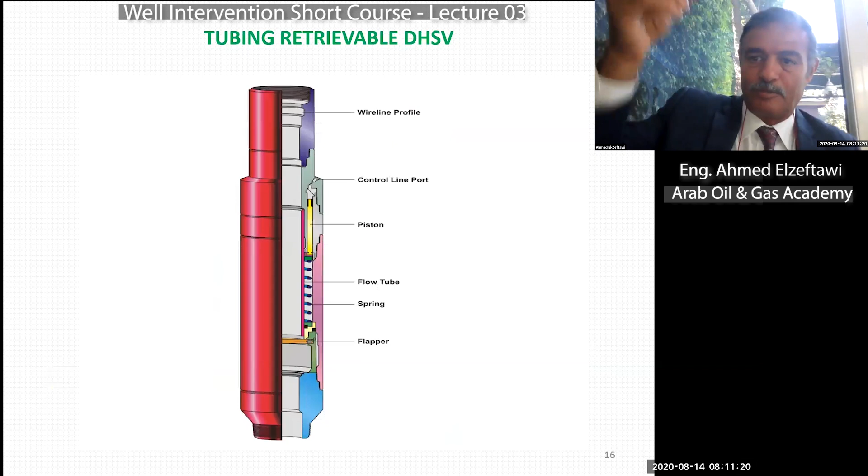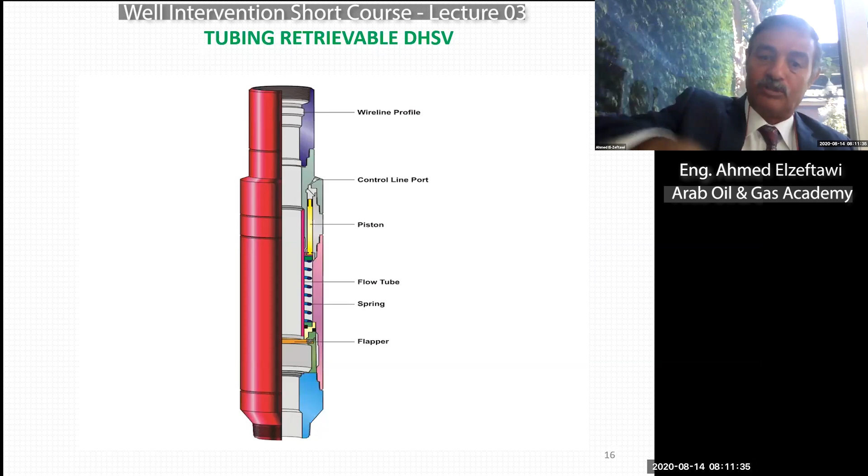And we have another option which we call the straddle set. The straddle set is a short piece of pipe. We can run it by hand on the surface, placing it across the sleeve here, pushing the flapper to keep it open. As long as this short pipe is inside this profile, the flapper cannot be closed. After we run it, we use the wireline to retrieve this straddle piece of pipe again.

So for tubing retrievable, we have two methods to run it open: either the control line or the straddle set, while for wireline, the only way is to use the prong.

The first devices we talked about were the anchoring devices, which was the landing nipple. Now we talk about circulating devices. For circulating devices, we have two: SSD, sliding side door, and SPM, side pocket mandrel.

Let's start with the sliding side door. What you see here is a sliding side door. It's a short pipe, but this short pipe has, on the outside and inside, a sliding door which is brown or orange colored.

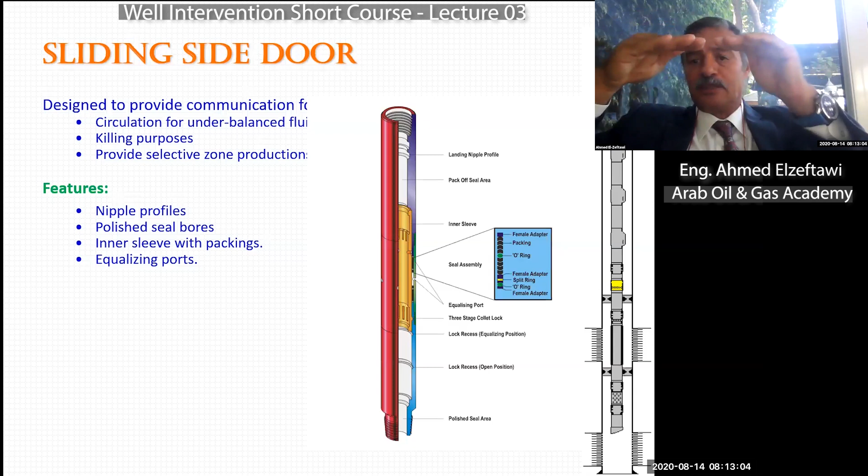If this door is closed, there is no communication between the tubing and the annulus. If we need to establish communication between the tubing and annulus, we run the wireline, the slick line, latch on top of this door, and start jarring, whether jarring up or jarring down. Let's assume jarring down opens it. The shifting tool will latch onto this sliding door and keep pushing it down all the way in, opening these ports and allowing communication between annulus and tubing or tubing and annulus.

This is the main reason for the sliding side door: to allow this kind of communication between tubing and annulus or annulus and tubing. What I need you to know about these devices is why we use them, to establish communication.

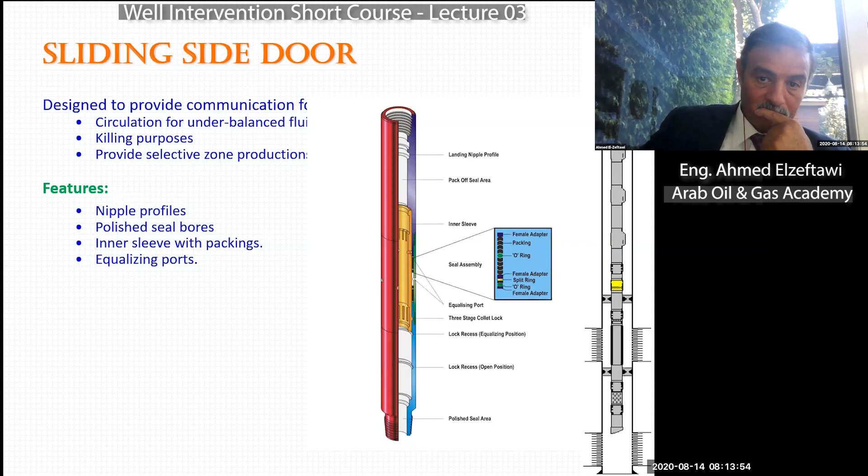Number two, what should we do before we open it? We agreed that you cannot open anything unless you equalize the pressure. So this pressure has to be equalized between the tubing and the annulus before you open. Number three, when you open it, you have to be sure it is fully open, because if it is partially open and you start pressure circulating, this sliding door will start to shake, creating vibration.

This vibration might affect the seal that prevents leaks when you close it. If this happens and you damage the sliding door, you have to kill the well, bring a workover rig, and pull the production. It is a hassle, a lot of wasted money.

Again, this device is for communication. Before you open it, you have to equalize the pressure between the tubing and the annulus. Number three, you have to be sure it is fully open. Number four, at what depth do we put it? If you look at the drawing in front of you now, someone will tell me we put it above the packer.

I said wrong, because if it is above the packer... if I put it here, this is above the packer. If I put it here, this is above the packer. If I put it on surface, this is above the packer. You are engineers, you have to be precise in what you say.

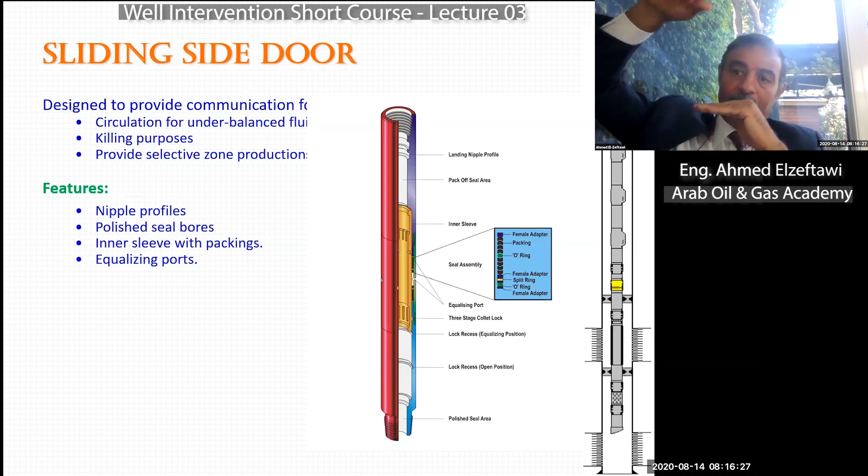It's almost 30 feet above the packer. So even if the fluid in the annulus settles down this debris and scale, you are still away from the SSD, and you can freely open and close it. So you put it one joint above the packer.

In this drawing, in this sketch, you have 2 packers. Why do you have 2 packers? Because you have 2 formations, so you have 2 packers.

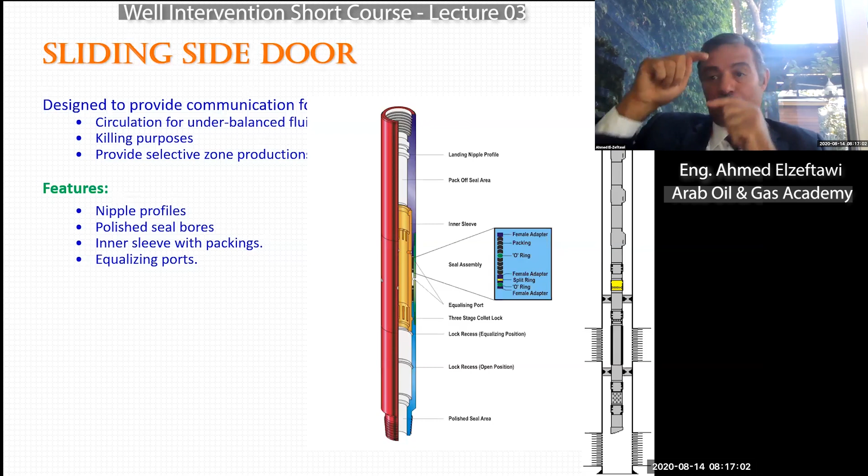So where we put our SSD, we put it one joint above the packer. The second one we put between the 2 packers. But the one we put between the 2 packers, it is not for circulation or communication, it is for production. If you need to produce from the upper zone, you open it. If you don't need to produce from the upper zone, keep it locked.

Number 2, equalize the pressure before opening. Number 3, be sure it is fully open. How do we know it is fully open? Because when you start jarring down, the moment you lose the jar and your tools go all the way down, it is fully open.

Number 4, we set it one joint above the packer. This is for communication or circulation, or between the 2 packers as we agreed for production. The other type, which will be the last topic today, is the side pocket mandrel.

Side pocket mandrel, it is a piece of pipe, short pipe, but it has a belly, as you see. There is a belly, it's like the pregnant woman, because in this belly I put a valve. We call it a gas lift valve.

We normally use this device for wells where it does not produce naturally, and it needs an artificial lift technique. And the technique I decided to use is gas lift, where we pump the gas, inject the gas in the annulus. It goes through these ports, passing by this gas lift valve inside the tubing, pushing the oil up.

But sometimes, in some applications, I run this device in natural flowing wells. Why? Because I have a vision from my study of the reservoir, I know that this well will flow naturally for maybe 6 to 7 months, then it will need an artificial lift. So from day one I make my design, I have it, and then the moment I need it, I go there, and instead of having what we call a dummy valve, so this one is not working, a dummy valve, it's a plug, I remove this dummy valve and put a gas lift valve instead.

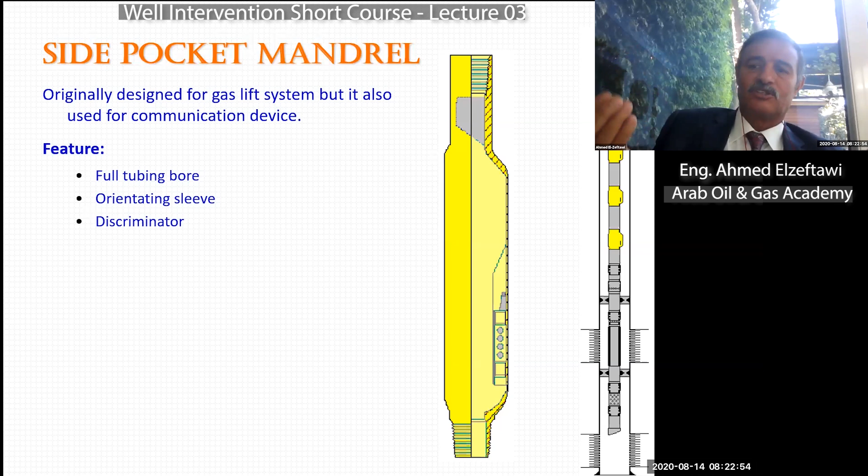So it is not correct to use a very expensive device and spoil it in an operation that needs a very cheap valve. And who told you that these gas valves will resist the chemicals you are pumping? If you are pumping resistant chemicals, you have to use a valve that is suited for chemicals and will not be affected by them.

So we can set in this profile a gas lift valve, chemical injection valve, circulating valve, and differential kill valve.

A question came in asking about killing a well. What you did is remove the gas injection valve and start circulating from the profile itself. It looks like in our example, he's supposed to put a differential kill valve, but he doesn't have one on location. So to not damage the gas lift valve, he removed it, and from this profile hole he will kill the well. The question is, what precaution should I take while killing or circulating from the profile?